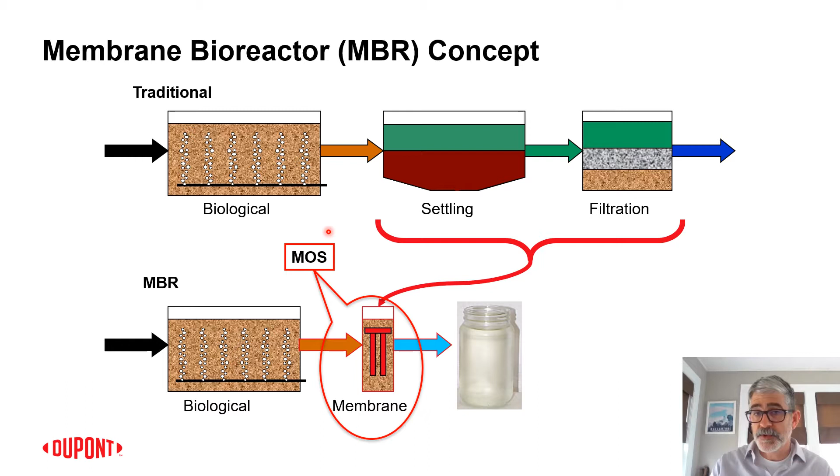The membranes and the bioreactor are one single piece, but when we talk about just the membranes, we call them a membrane operating system. You may hear me use that phrase in this presentation.

I call this slide the Acme membrane bioreactor just because 80% of what we build is this. It's an anoxic zone, an MLE process with membranes at the end.

So a couple of things to note here: just like in a clarifier, you're sending liquid forward, you're sending mixed liquor forward, and you're returning. So there's a loop here. It's a little less than a clarifier, like 1.5 to 3Q, but this is a 4Q return, or 4Q forward, 3Q back, and 1Q of filtrate. Q, in this case, is the flow coming into the plant. We want to match that in the effluent, but we're continuously recycling.

The reason for that is membranes would act as a dewatering system. If we just left liquid in here, kept feeding liquid to this tank, eventually the water being removed through the membranes would cause solids to accumulate here. So we need kind of a refresh stream to keep things moving. The concentration in your membrane tanks, just because of a mass balance, will be higher depending on the Q ratio here, but it'll stay at a manageable level.

Sometimes, again, I call this Acme because it's the most common, but you can have 5-stage Bardenpho, you can have MLEs, you can have anything you want in the bioreactor. Sometimes there are internal recycles, et cetera. Sometimes there are deox zones after the membranes because you don't want to poison - say your return is going to an anoxic or an anaerobic zone. But this is generally what we do. It's a pretty simple and straightforward process.

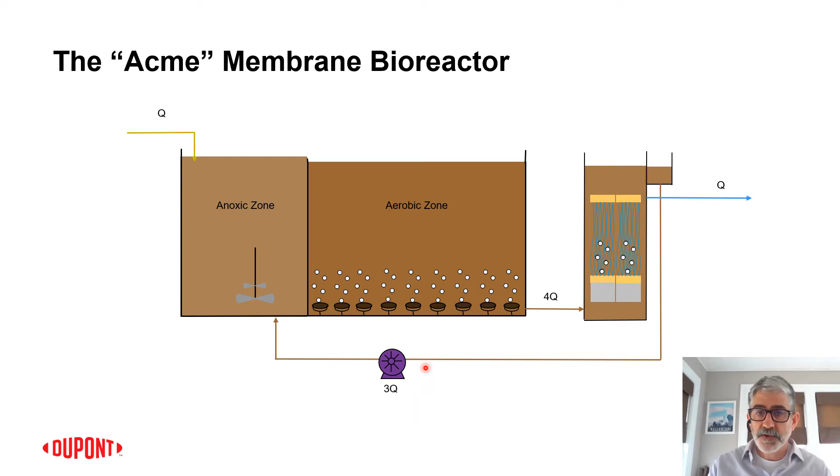This is a membrane pore size reference chart. The membranes my company makes are ultrafiltration membranes, so they're 0.04 micron. That's what this red line is.

Some membranes in MBR, which are fine, are microfiltration. They're different, and you might get different results, but there's nothing wrong with those membranes. But what we're trying to show here is the type of particles that would be excluded by these membranes, which is basically anything to the right is what's excluded by these membranes.

So there's a lot in there, and there's some things that aren't, notably salts, metal ions, atomic particles, obviously. But membranes, ultrafiltration membranes are designed to remove solids. These are all particulates, these particles.

So particulates are suspended in solution, they're not dissolved. So things like nitrate, dissolved TOC, those are on this side of the chart in that they're dissolved or molecular, and they're not going to be retained on the membrane. So the membranes are purely to retain solids, which is a lot of stuff in a mixed liquor stream, but not everything.

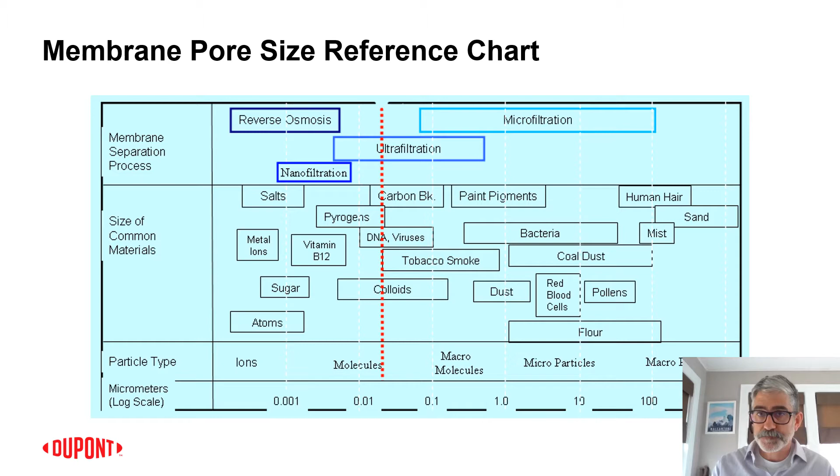So this slide is intended to just demonstrate kind of the principle of operation of MBRs. When MBRs were first introduced, people didn't think they would work because in most conventional membrane filtration processes, you're limited to about 200 ppm of solids. And in a mixed liquor environment, at the time when they were thinking about MBR, it was 2,000 to 3,000, as we talked about with conventional mixed liquor treatment.

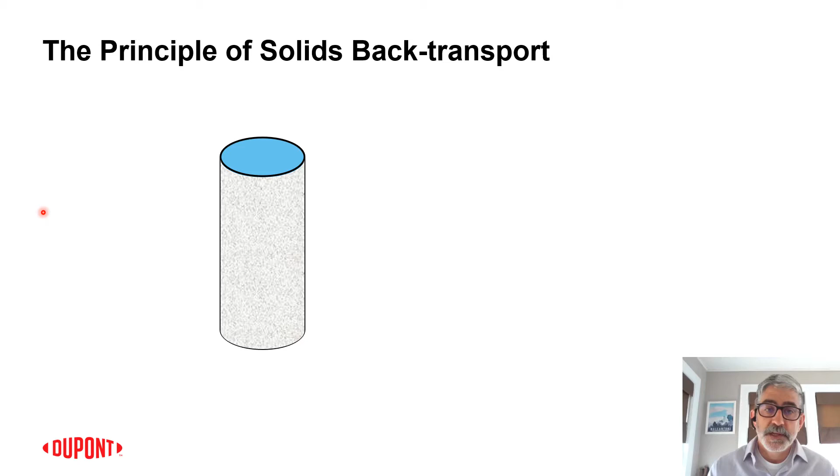The way these membranes are made to work is through the principle of solids back transport. So what that means, filtration is occurring by creating a suction pressure. This is a hollow fiber membrane. It would be analogous in a flat sheet membrane. I just use this because it's the type of membranes my company manufactures.

But these are membrane tubes where this blue here represents water. This is a membrane. So what we're doing is we're pulling a suction on the lumen side of the membrane that draws mixed liquor to the membrane surface and allows filtered water to pass through. So we're transporting via that suction pressure mixed liquor to the membrane surface. That mixed liquor consists of solids and liquid.

As you pull mixed liquor through the membrane and clean water leaves, what you get is what's called a concentration gradient. That means that solids start to accumulate at the membrane surface, and it creates something called a cake layer. The cake layer is actually a pretty cool thing, a pretty cool dynamic, because it actually provides some protection to the membrane, both on a chemical basis and from damage to the membrane.

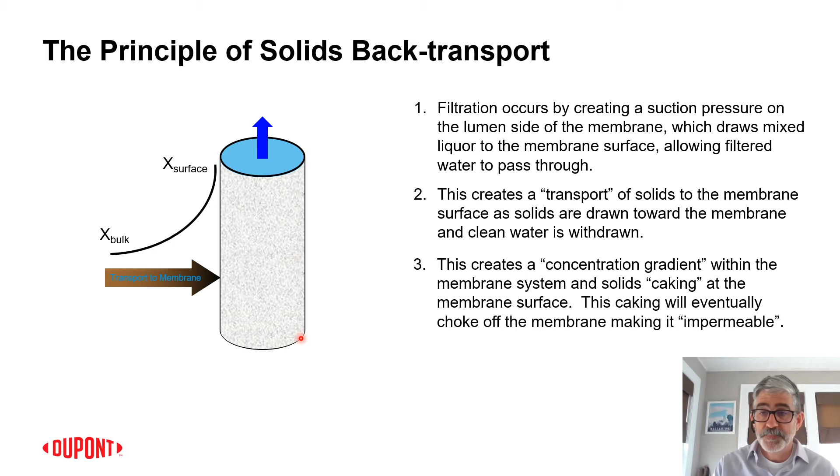But if there's too much caking, the membrane will be choked off and it will become impermeable. Permeability is a measure of how easy it is to pull water through the membrane. Impermeable means you can't pull water through the membranes. So the solution is create a back transport of solids away from the membrane surface.

We're pushing air and mixed liquor that pushes the solids away from the membrane. So you're just mixing. It's just mixing energy. And it takes some of the solids and it provides a back transport away from the membrane. And that's what makes membrane bioreactors possible.

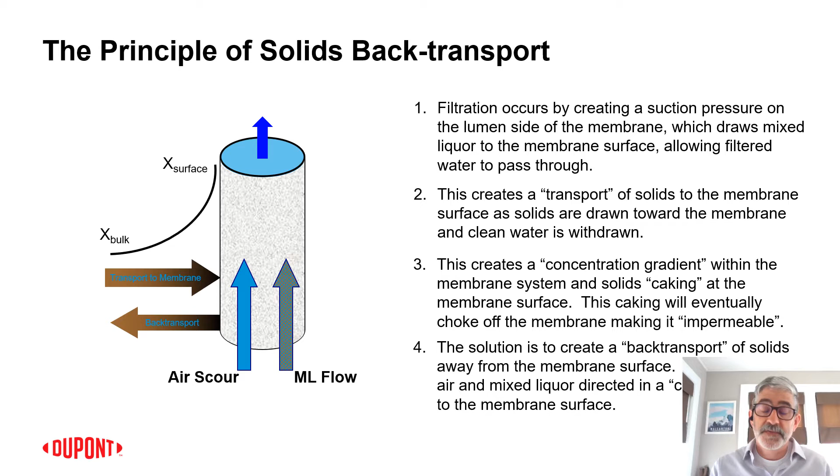But it also creates the biggest issue in MBRs, which is solids accumulating inside the matrix of the membranes. If your air scour is inefficient, you will have to do manual cleaning of the membranes.

Okay, so a short history of MBR technology. Again, this is very short. A company called Dorr Oliver did some testing with side stream MBRs in the 60s.

Side stream is literally, you would take a bioreactor and have a stream of water coming out, going to a membrane and coming back in. So it created a little circuit, and the membrane would draw a little bit of clean water all the time through that circle.

The advantage of that is you get great mass transport through that little circuit, but they weren't very space efficient. They weren't immersed in the mixed liquor, so you had to pump it through these little tubes, and you had to have multiple little tubes to make it work. So it didn't really go anywhere. People knew it worked in principle, but it didn't go anywhere.

It wasn't commercially viable. So the Japanese government in the 90s launched a program in Japan. There's a high population density, a lot of small sources of wastewater, malls, and urban centers, so they wanted some technology that would have a small footprint. So they funded a project which turned into the Kubota membrane.

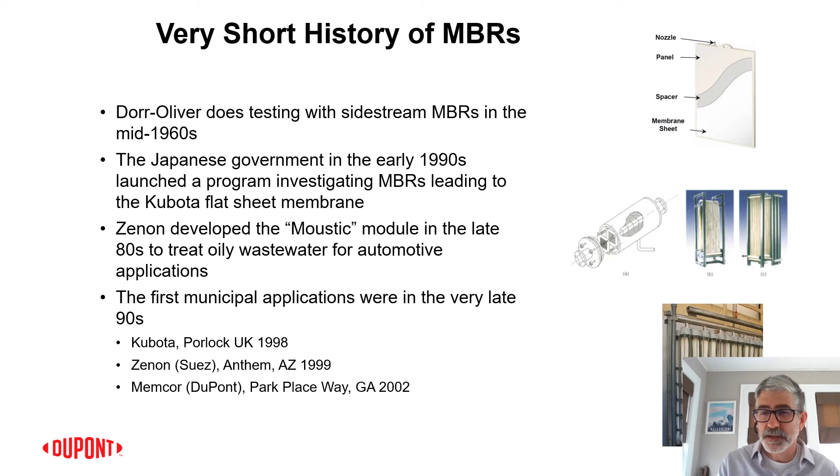This is the Gartner hype cycle, which I referred to, and this much more resembles what happened with MBR. The principle here is that somebody comes up with a cool new technology - again, this was intended for software, but it applies here. They develop a cool new technology and start developing offerings to the market, and there's an adoption curve. This isn't volume of sales, it's expectations on the y-axis here.

So people were really excited - we'll just hop into the MBR analogy. People were really excited about MBR. We got first generation products, people start, early adopters investigate, you got people starting to build plants. Just some media hype - there was media hype, believe it or not, in the early 2000s. Supplier proliferation, you got people adopting, and then negative press begins, right, and then failures. And that definitely happened in MBR.

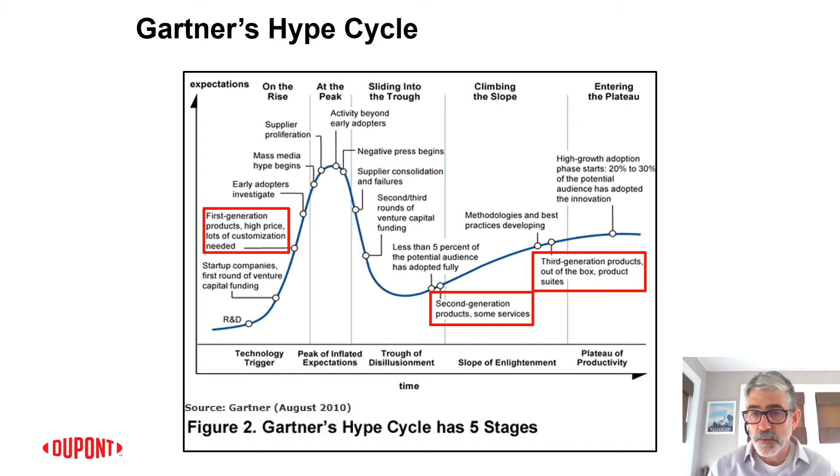So first generation MBRs, the very early designs, both Kubota and Zenon, were immersed in the biology, meaning there was not a separate membrane tank. The membrane sat in the mixed liquor. There were some advantages to that - you could just pop them right into an existing bioreactor and get that capacity. A lot of early plants did that.

We were the first to - my company kind of grew out of drinking water membranes, so we just had a different philosophy of operation and cleaning. So we wanted to have a separate membrane operating system, remember I used that phrase earlier, so that we could do chemical cleans.

Design criteria varied widely. We had SRTs all over the map, and the big thing was MLSS. Right now, to give you a preview, we run about 10,000 ppm. People were going up to 25,000 in the early installations, and flux rates were all over the place. There were a lot of people - it was early enthusiasm, it was before my time, honestly - but people thought these things could do a lot more production than they were actually capable of. Mostly small systems, early adopters. This is a picture of what we call an express plant.

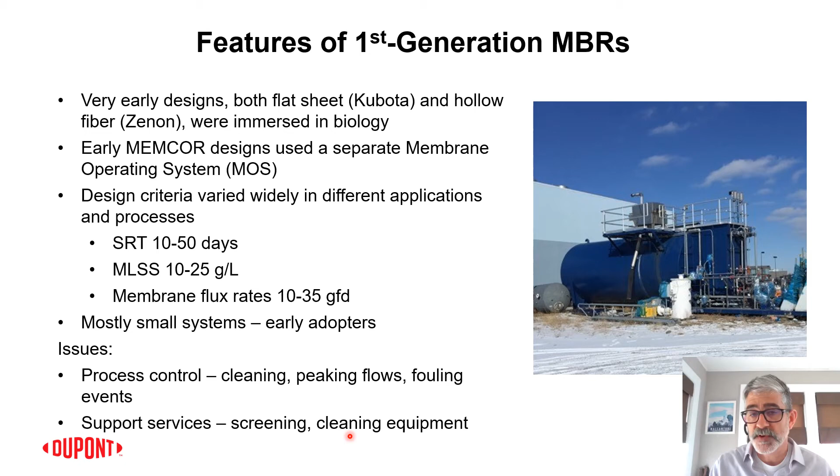It's an early express, a product my company made. But this was common - package MBRs were common, and had issues. Fouling was a big issue. Process control was a big issue. Things happen at a microscopic level in membranes that are hard to predict, and they happen over long periods of time. So these early adopters developed applications and processes that would work well for 6 months and then run into roadblocks, and we weren't sure why. And support services - this is kind of a preview - became much more of an issue later, but screening and cleaning equipment became an issue in these first generation MBRs.

So second gen MBRs, the technology started to be adopted more widely. What I really feel is the defining criteria of these second generation MBRs is that we settled on process set points - I'd say they converge here. This mixed liquor concentration - the flat sheet guys run a little higher, sometimes they don't, but really we're around 10,000 as an industry in the membrane tank. Flux 10 to 30 GFD. This is realistic and it's consistent across different membrane technologies. There are advantages within different membrane technologies for various reasons, mostly hydraulic, but within this range we all operate pretty closely - within 10% of each other from a flux perspective.

Larger systems started to be built, and as we started building larger systems, there were issues. The big issue was power - efficiency, I call it. The second gen plants used a lot of energy. They used about 6 times what we use today for air scour, for that solids back transport that I talked about.

Process control and cleaning, also issues. They've always been issues, but really the biggest thing here was screening. Screening was a huge issue. Most wastewater operators, when you start talking about membrane bioreactors, their first focus is on how fine the fine screens are going to have to be. I think in this second generation - again, this is a little before my time, I started coming in right at the tail end of this - there were compromises that manufacturers, operators, and engineers made to try to make that fine screening question as manageable as possible. The biggest thing was the type of screens that were approved and the redundancy requirements on those screens.

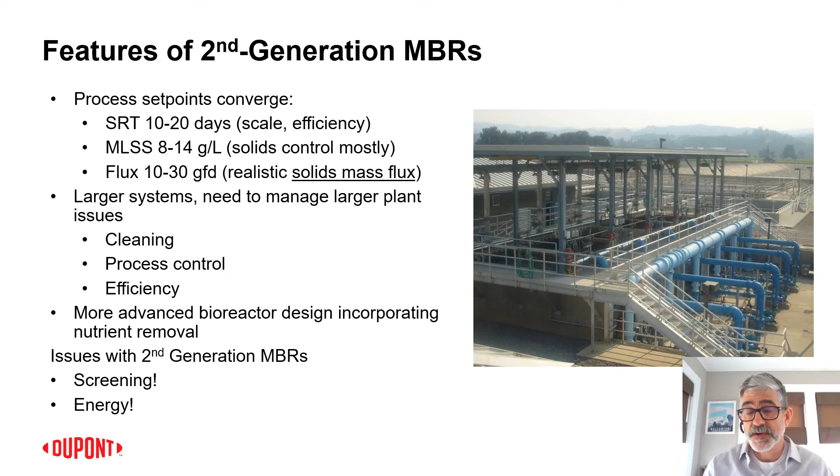So this is kind of the result, and I mentioned back transport being kind of the key in MBR operation. I'm not showing these to pick on any suppliers - I think one of these is actually my own membrane. This one is a flat sheet system, I think. But I'm just showing here what happens when screening breaks down, or when air scour breaks down. This solids packing - you don't need a PhD in membrane science to see that the mixed liquor is going to have a hard time moving through this matrix of membranes. You see the fellow here with the blue gloves - he's going to be doing some manual cleaning, because this has gotten so bad that the aeration can't keep up with it.

Here we talk about the primary methods of limiting solids fouling. MLSS concentration is one. Really, screening is the big one. Membrane flux, how we operate the plant, is a big one. But really screening and air scour are going to be your main tools to prevent this kind of thing from happening.

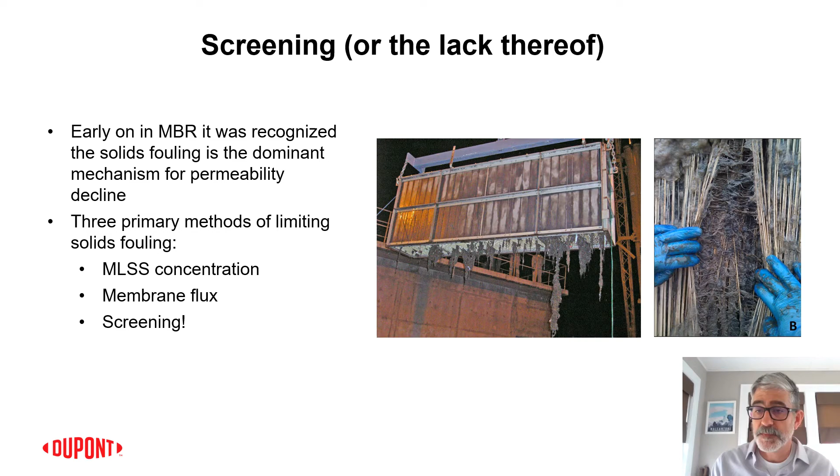Screening is largely figured out. Most MBR suppliers, I'd say all of the major ones, have converged on 1 to 2 millimeters for most applications. I often send around a presentation by a PhD named Dr. James, who was at Avivo using Kubota, and he recommends 1 millimeter. I'm not trying to call out Kubota, I don't know what they're doing today, but the point is everybody understands that tighter screens are better.

They prevent a lot of the fibrous material and hairs from getting through. We don't have any bypass on the screens anymore. We have 100% redundancy sized for peak hydraulic flow, meaning if I get a screen out of commission and there's a rain event tomorrow, I'm okay - everything's going through the screen, nothing's going to bypass.

We've also settled on technology and configurations that work well with MBR. The workhorse of the industry is an internally fed rotary drum screen, not an in-channel. In-channels are okay, we do them once in a while, but really the out-of-channel drums are best because they just have two big seals on either side - there's very little to fail and plenty of hydraulic space. There are some interesting band screens now designed for MBR that we like, but the internally fed drums are still the workhorse.

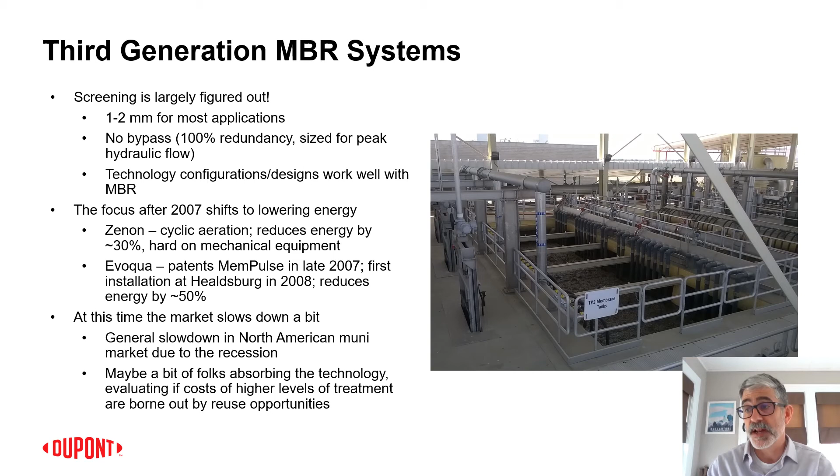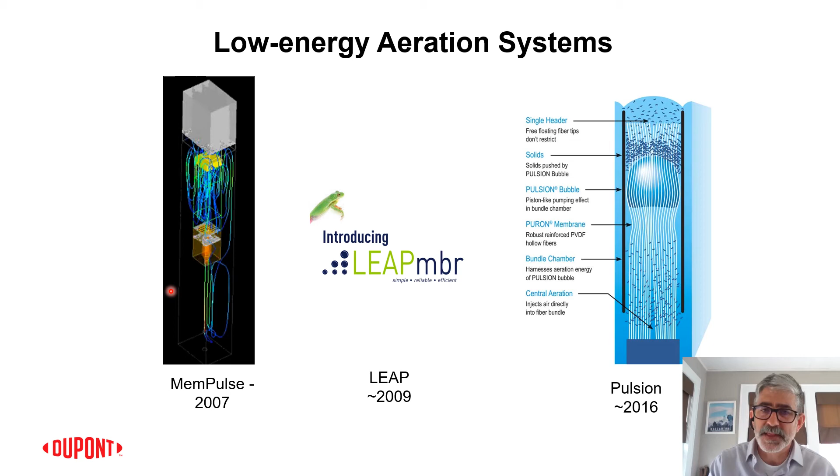If you look at this box at the bottom of the membrane, it fills with air - there's a constant feed of air coming from the top of the module, filling this box, and baffling down there provides back pressure until it's full, then the whole bubble pops at once. It's like large bubble aeration - you get the best mixing energy at the lowest cost with a large bubble of air.

All right, so some case studies here.

Stevens Pass, this plant went in 2004, is at a ski resort. It was a retrofit of an existing conventional MLT plant. They had some reuse drivers, they wanted to do some stuff with the water, so they wanted to take their existing mixed sugar plant and do membrane treatment with it.

So they used 500 micron wedge wire strainers. I say wow here because that was really unusual at the time. I mentioned DuPont came from drinking water membranes, and in drinking water, 500 micron is kind of normal, that's the standard. I think this 04 plant was before my time a bit, but I think MEMCOR at the time was looking at this and saying if we had that, it would provide a lot of benefit. It does demonstrate that in this first generation system, parameters were all over the place. Some people were using no strainers at all, but we had these 500 micron strainers.

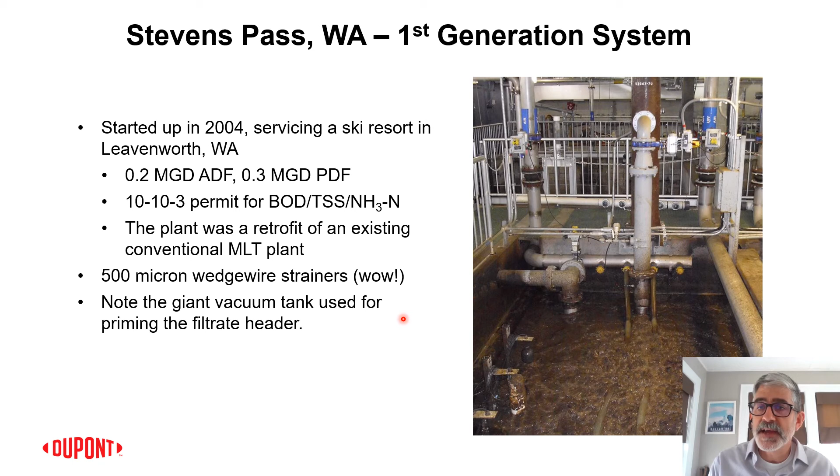I think it has something to do with the longevity of this particular plant. It's done really well. There is a giant priming tank here, which was kind of a feature of first generation systems, we all had them. It was a vacuum pump hooked up to this.

There's a brown fiberglass tank, and it was attached to the filtrate header here. So when you stop filtration for a clean or something, the mixed liquor would fall out of this because it'd fall back to the tank level. This would be used to prime the header. So they'd pull a vacuum in here that would pull mixed liquor up back through this header so the pump could grab the liquid and start pumping. We've since eliminated those in second and third generation systems.

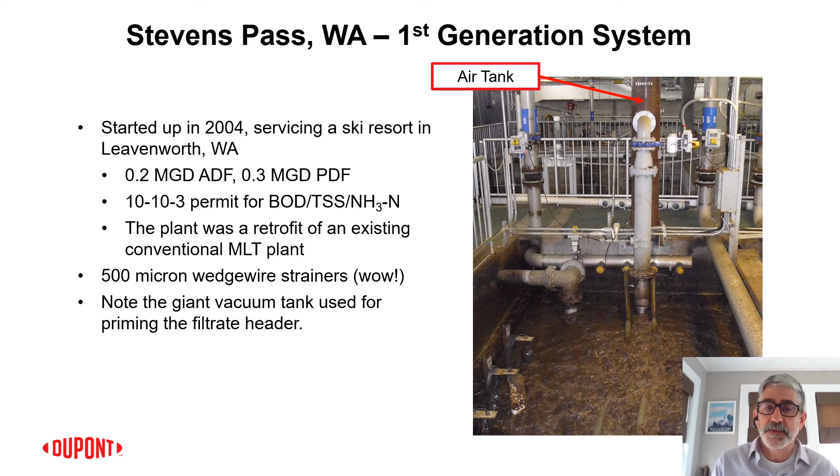So, lessons from first generation systems. This is the Stevens Pass plant. We retrofitted these, this is our newest module. So we had a retrofit kit.

That's important. When you have these older plants, I'm pretty sure I've heard of some of my competitors doing the same thing, where they take older plants and make a membrane available. I do a little bit of a commercial for what I call vertically integrated membrane companies, where we build systems and make membranes. There's a few of us. We're going to develop packages for our older customers to make sure they can keep operating. This plant is 18 years old now, and we just put new membranes in. It'll be operating for a while.

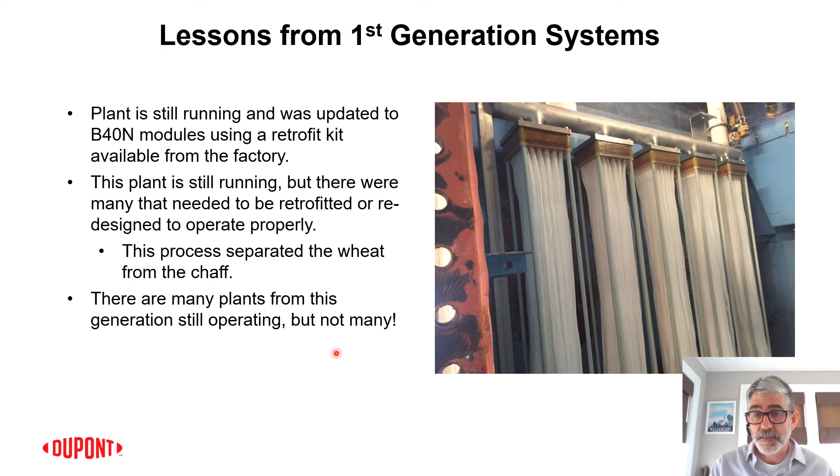I think that a lot of plants, because of the gaming that went on with process parameters, had to be retrofitted or redesigned. I say this process separated the wheat from the chaff, that's in terms of manufacturers. There are a lot of people that did MBRs in that era that aren't anymore because they couldn't make that commitment to the market to make plants work. There are many plants from this generation still operating, I'd say, but not as many as there were.

Healdsburg, California, I mentioned this plant before. This was started up in 2008, so kind of on the cusp of that third generation, but it used MEMJet, which was my second generation technology, except in one cell. They were the beta site for MEMPulse in 2008.

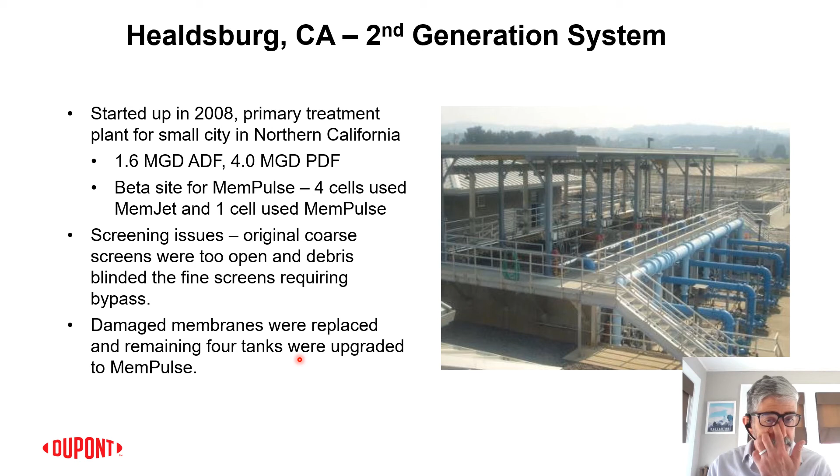They had screening issues. I think I mentioned that their coarse screen was too open, so they had bypass go through and it blinded off the fine screens. Damaged membranes were replaced after that bypass occurred. And as part of that upgrade, they upgraded the other tanks to MEMPulse.

They still have occasional issues with screens. They use in-channel drums. They had a bypass six months ago. I talked about band screens already so I won't re-mention that. But that ability to upgrade to a new aeration system is something some of my competitors offer and some don't, though I think many do. An interesting thing about these second-gen plants is that they're reaching 10 plus years old, which is kind of the standard duration of a membrane warranty now.

So what we've demonstrated, in terms of being ready for implementation, is that this particular plant, Healdsburg, runs the same aeration process and membrane that we've used since 2008. We've made incremental improvements to the process and some mechanical features, but if you bought a plant today, this is what you would get. We're demonstrating 10 plus years of membrane life. They actually have two tanks at Healdsburg that are on 12 years right now.

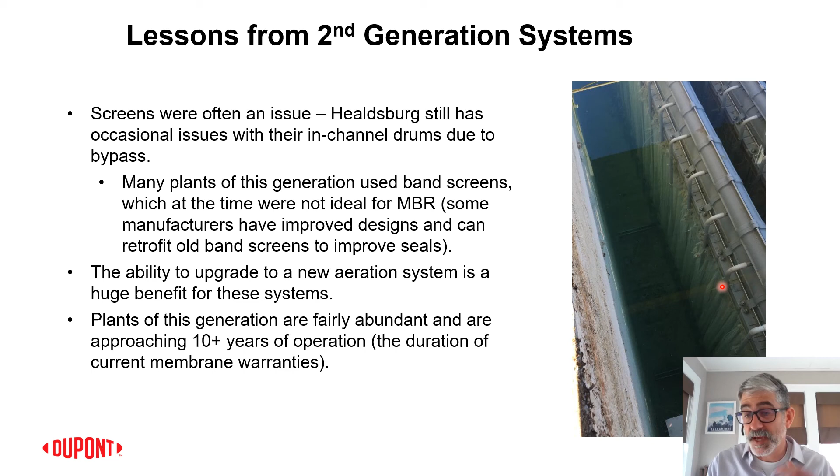It uses turbo blowers for air scour, that's a great benefit. But really what this Jennings Road plant is, is kind of a case study of being ready for implementation. They have the right operators, the right equipment, the right screening, and an ongoing relationship with their supplier.

This plant's been running since '15. We started design in '13, so we've had a relationship with them for 9 years. They still call my techs all the time to talk about different things, modifying processes. If they run into minor issues, it's a phone call, changes to the HMI, or something like that.

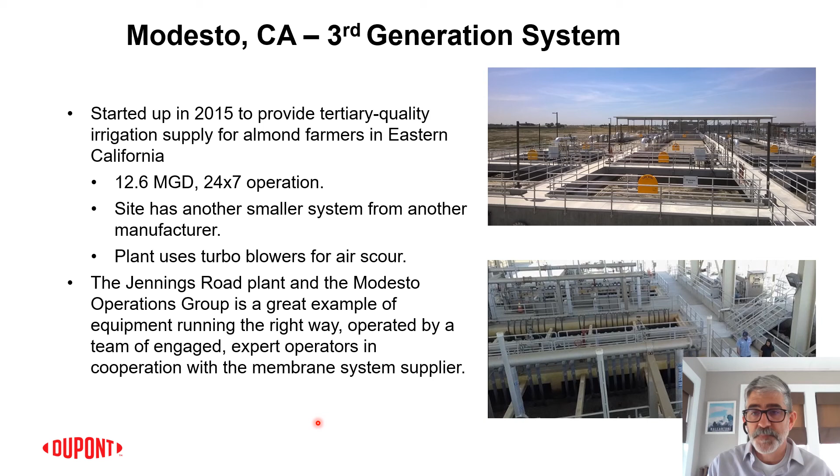So this plant is a success story. It's been running great. They have another system here that's been running 8 years, I want to say, from another manufacturer. So these guys are an example of how this technology works the right way.

All right, what's next for MBR? I'm just going to run through this quick, my time is running out. Forward look at the market: growth is huge. This is just me in the last 5 years, and these are just the big plants, for the most part. Tuas, 129 MGD, Changi 40 MGD, Rimini 40.

We're going to be building a plant, actually it's Sarasota Bee Ridge, 28 MGD max month flow. So 7-8% growth annually is what we're estimating as a company. But more plants are looking at IPR, DPR, it's driving investment, especially in bigger plants.

Manufacturers continue to innovate. It seems mostly incremental, but we'll see what people have up their sleeves. Ceramics are talked about a lot. They're real, there are ceramic installations, but they're still kind of working out the kinks, in my opinion. I think they're still on that first generation of development.

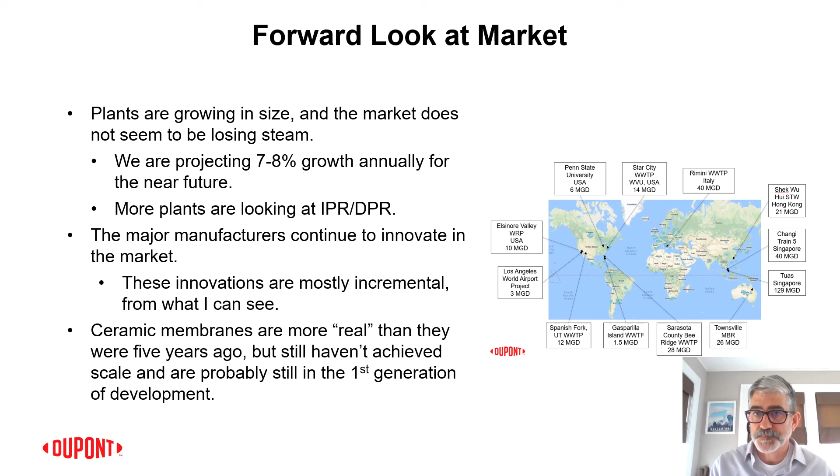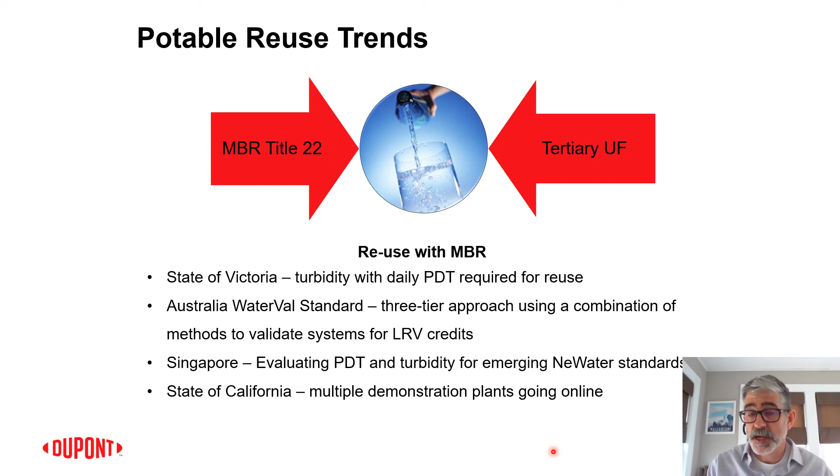Potable reuse trends, we're seeing this. You've got Title 22, which has been around for 20 plus years. Tertiary UF, people are looking at doing something akin to these with MBR, and there's some big projects coming in. Singapore is doing 2 big plants, and I talked about them using our membranes in those plants. State of California has multiple demonstration plants going online.

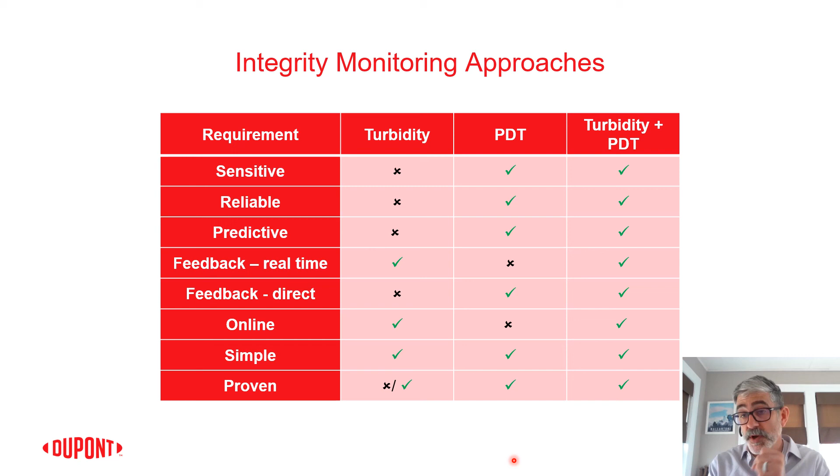When you talk about reuse, there are folks that talk about turbidity. Most regulators are attracted to some form of pressure decay test, which is a process where you pressurize the inside of the membranes to determine their integrity. If there were defects in the membrane, pressurizing them would cause the air to just leak out. But if membranes are integral, they should hold pressure for some period of time. We think turbidity and pressure decay are going to be the best approach to reuse and potable reuse with MBR.

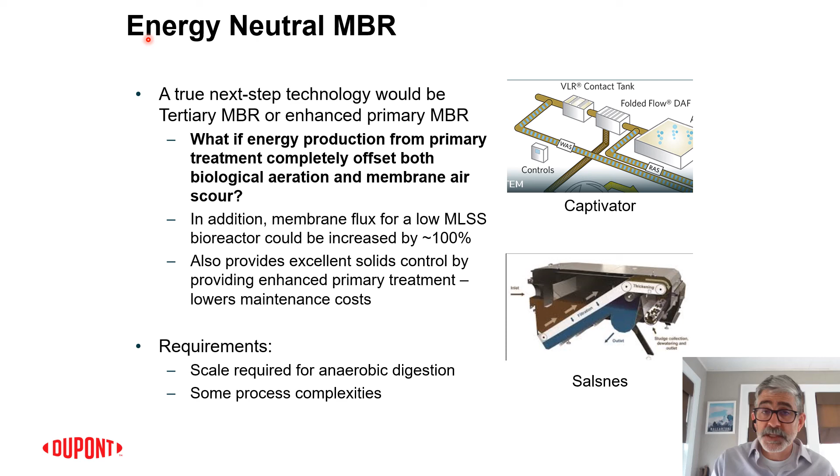Energy neutral MBR, this is a concept that's pretty interesting. Basically, using some type of solids capture, whether it be a high efficiency screen - these filters go down to like 20 micron - to remove solids and then send those solids to an anaerobic reactor to produce energy. That would be the concept, but there are advantages where if you're removing a lot of these solids, the membranes can run at higher flux because the screening is so good. So there's a lot of potential with this energy neutral MBR. It's still in development for the most part.

And then anaerobic MBR, this is a big one where it's basically taking the same thing we talked about, taking a mixed liquor treatment system and putting membranes on it. You're doing that with an anaerobic reactor, so you have an anaerobic reactor where you're using membranes to retain biomass or to do kind of the decant function of an anaerobic reactor. And because you need to remain anaerobic, or zero oxygen, you're using the biogas as scour air for the membranes.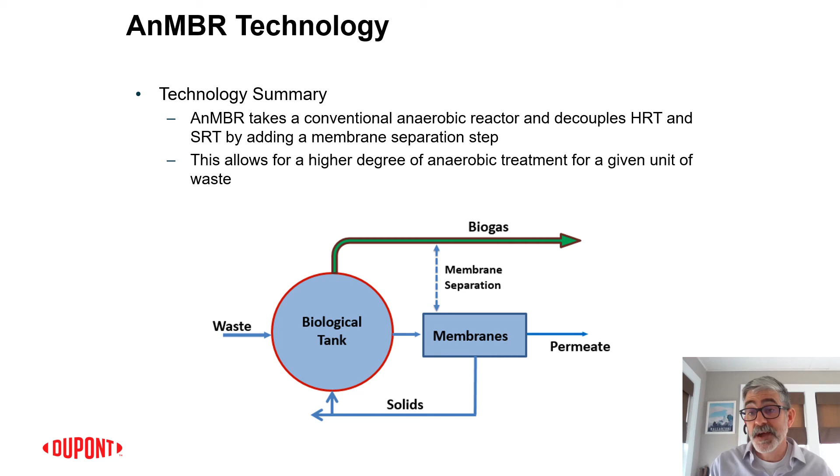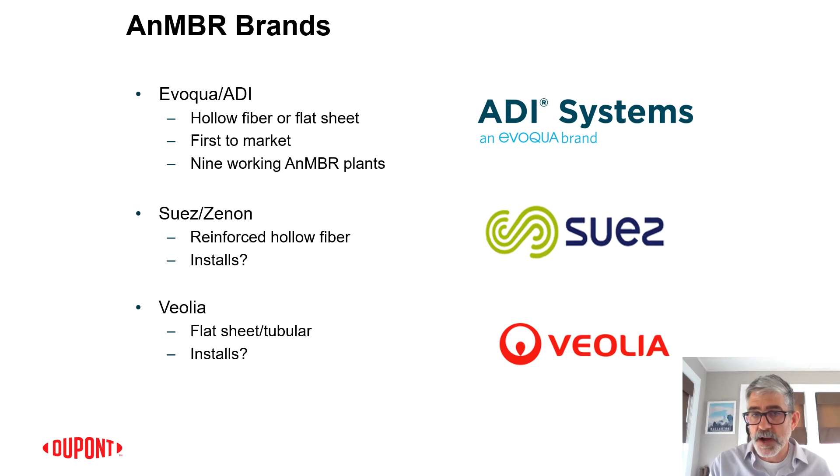This is pretty interesting, it's mostly on food and bev technologies. There's a few people doing it. These ADI guys, they use our membranes. Suez is doing it, I think they just have their first installation in New Jersey or Delaware. And then Veolia, I'm not sure how much they're doing, but they advertise it.